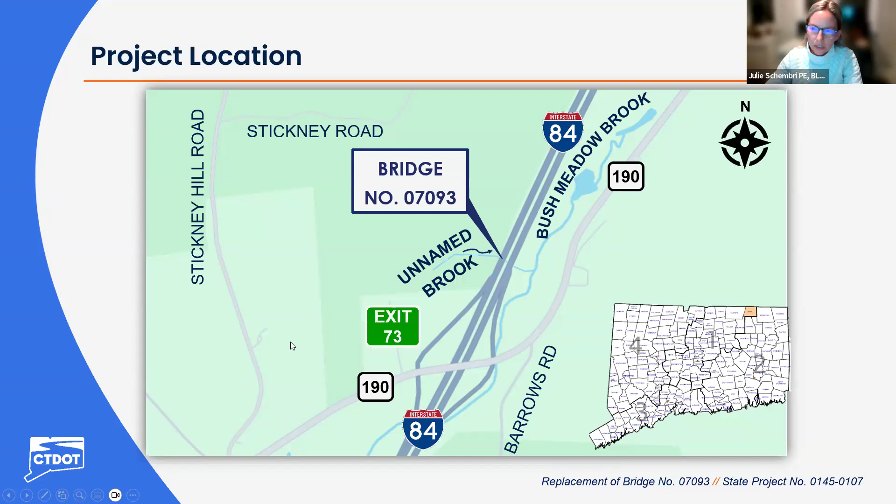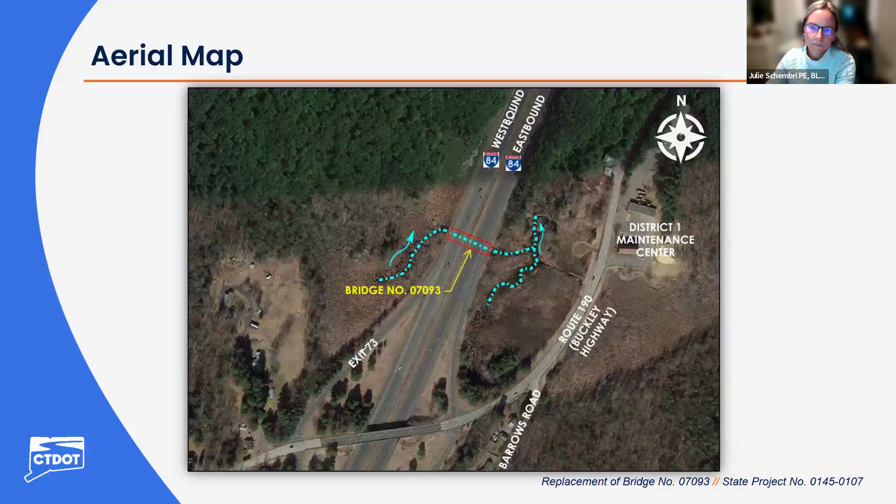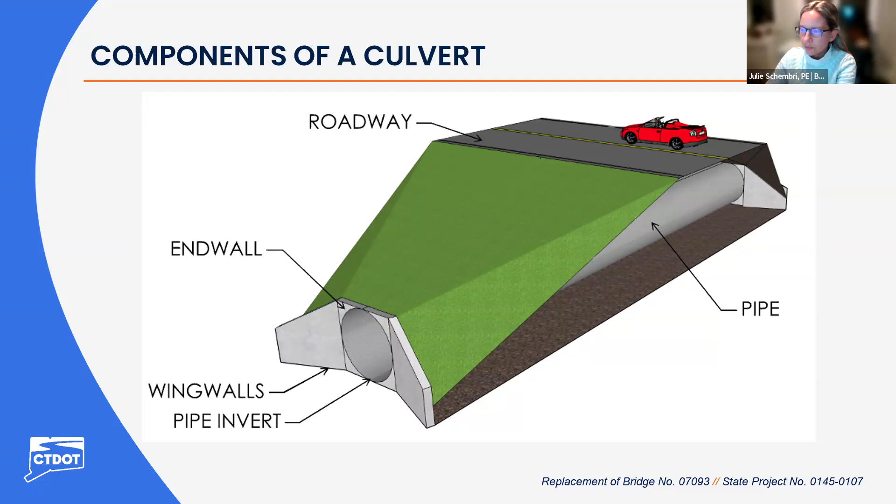Every 2 years, Connecticut DOT inspects all bridges with a span length greater than 20 feet, in accordance with federal standards. Connecticut DOT then compiles a report that includes condition ratings and any noted deficiencies.

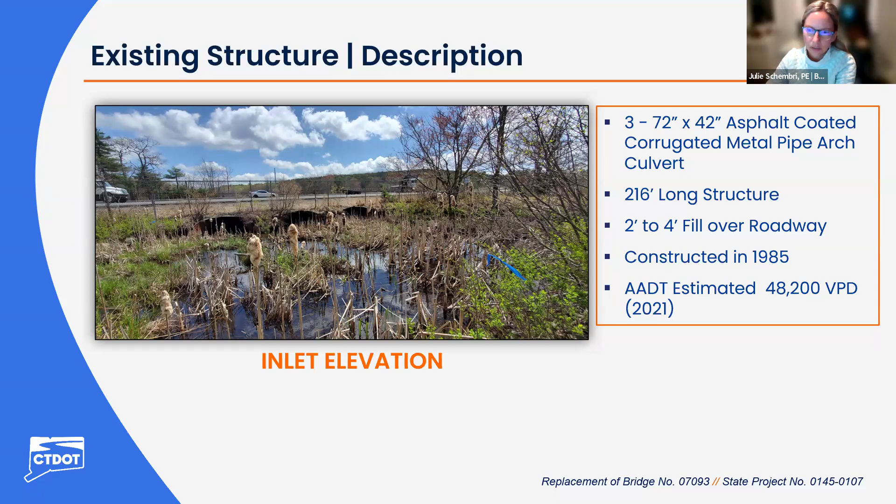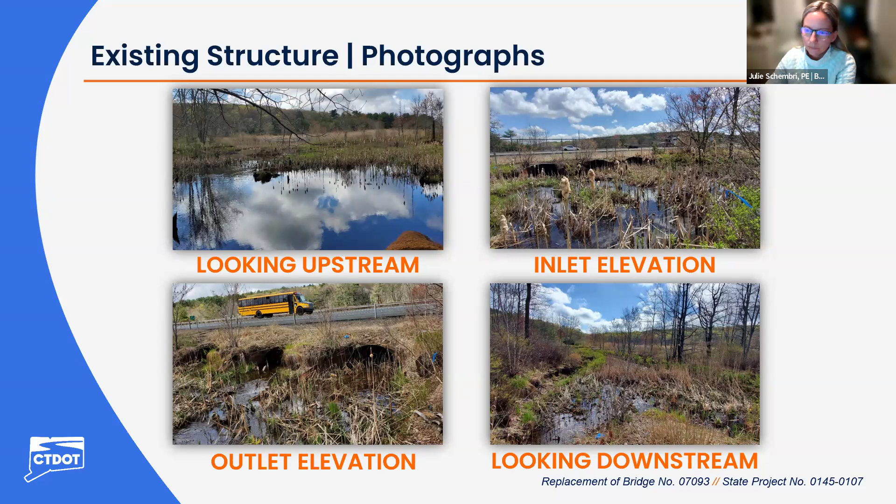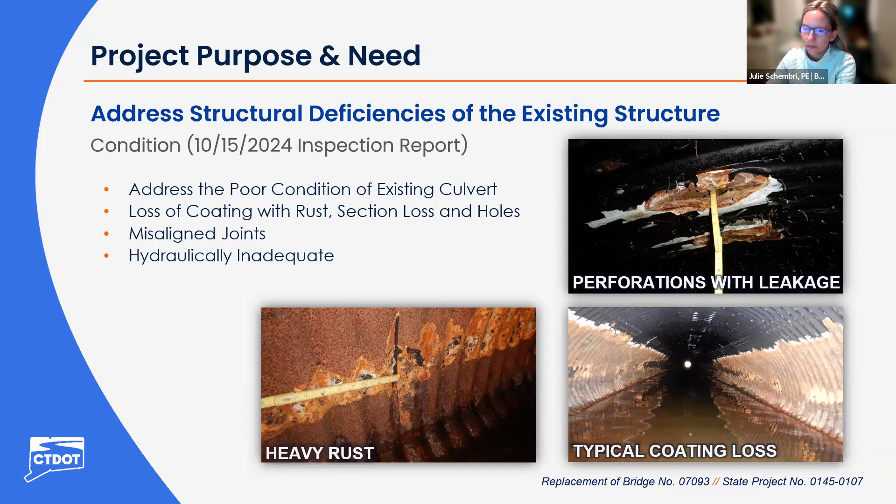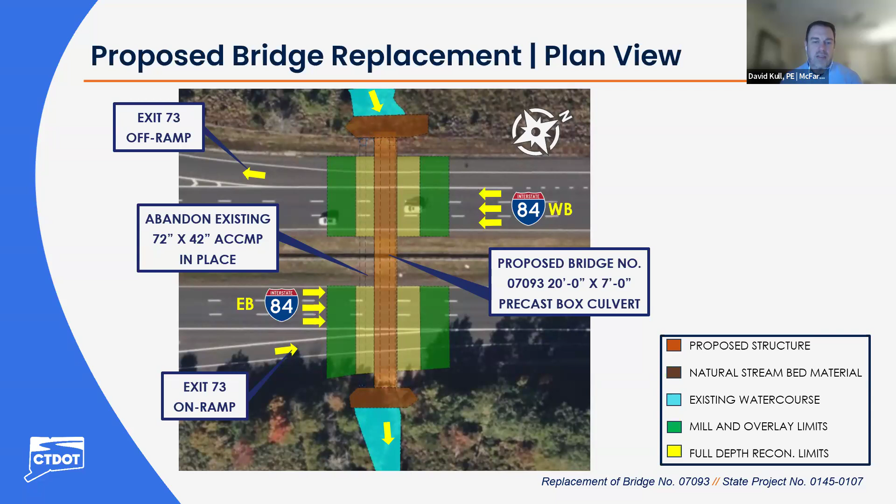Thanks, Julie. So after a study, what we've come up with is a plan to replace the three corrugated metal pipe structures with a single precast concrete box culvert. It'll be basically a square box culvert measuring 20 feet in width and 7 feet high, sized to carry all the design flow from the unnamed brook passing underneath I-84. We're going to be placing this culvert pretty much where the existing pipes are, but offset slightly so that we can use the existing pipes as a water control feature to help facilitate construction as we go in and replace them.

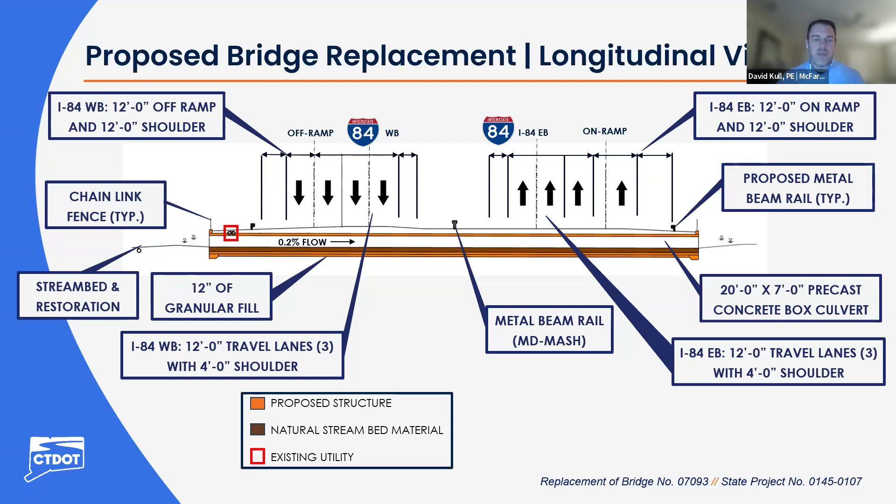So if we take a look at the next slide, this is a longitudinal view of what the structure is going to look like underneath I-84. There are a lot of different callouts on here. The main thing to recognize is that what we see when we're driving on I-84 is not going to change when we're finished with construction. This new structure, designed to last 75 years, will pass underneath the roadway, and what you see on top of the roadway pretty much isn't going to change from what you see right now.

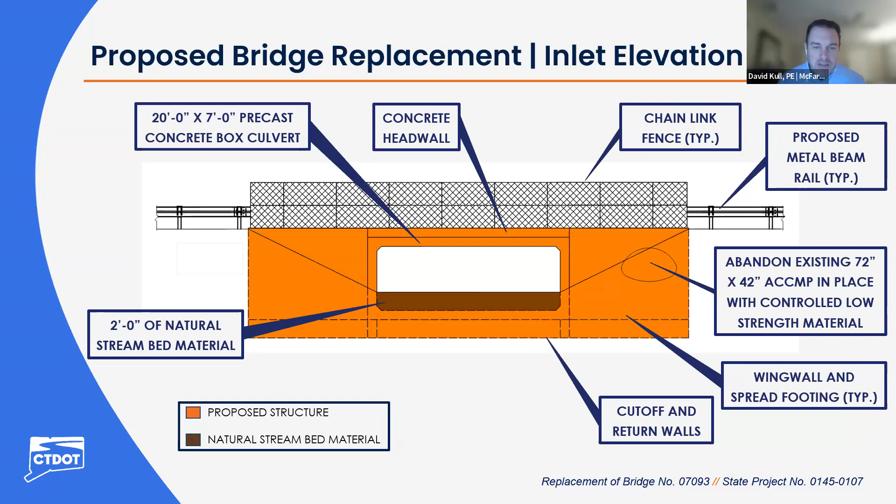So like I said, this is designed to last 75 years, and it's going to look pretty much as you see right now when you're driving on I-84. So if we go to the next slide, how are we going to build this structure while maintaining traffic flow?

I'm going to pass it over to Gene McCarthy. He's going to talk about maintenance of traffic during construction. Thanks, Dave. So in order to replace this culvert at this location, we're going to have to maintain traffic both on Interstate 84 and Exit 73. So what we're proposing is to replace it in 3 stages, essentially replacing the culvert in 3 pieces.

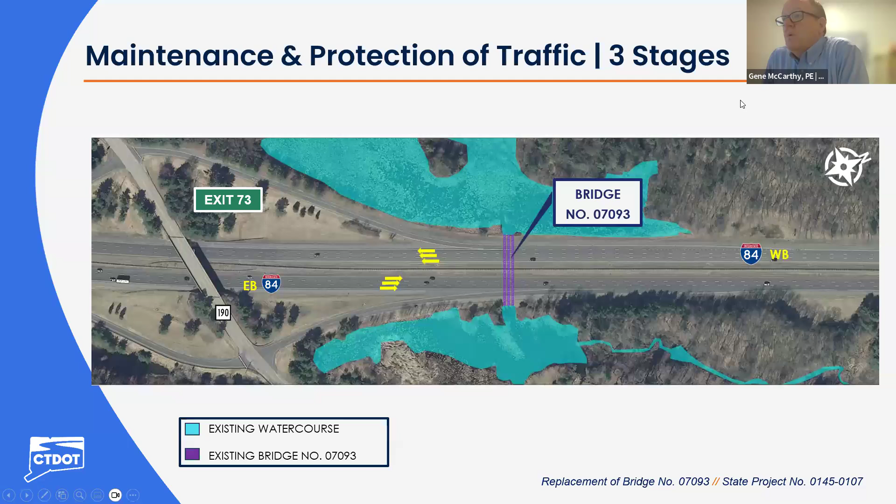Important to note, Interstate 84 has 3 lanes of traffic in each direction, and we will be modifying that during these stages of construction.

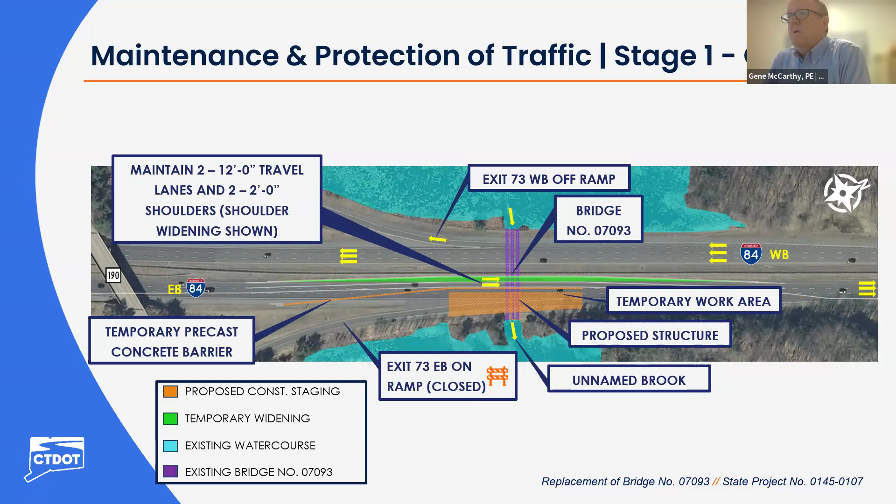What stage 1 will require is that the eastbound lanes on Interstate 84 be reduced from 3 to 2, and those lanes will be shifted towards the median of 84 to provide space for the construction to occur. As we look at a closer view, you'll see the actual proposed structure that will be replaced as part of stage 1.

You will see in green some temporary widening that will occur on the median of 84, and you'll see the 2 lanes of traffic on 84.

In orange is a temporary concrete barrier that provides protection for both motorists and the construction crews. It's important to note that this stage of construction is estimated to take about 2 to 3 months to complete.

As we move into — sorry, can you go back one? Another important thing to note for stage 1 is that the Exit 73 on-ramp onto the eastbound part of 84 will have to be closed during stage 1. There will be a detour set up for this traffic, and I will show that detour at the end of my presentation.

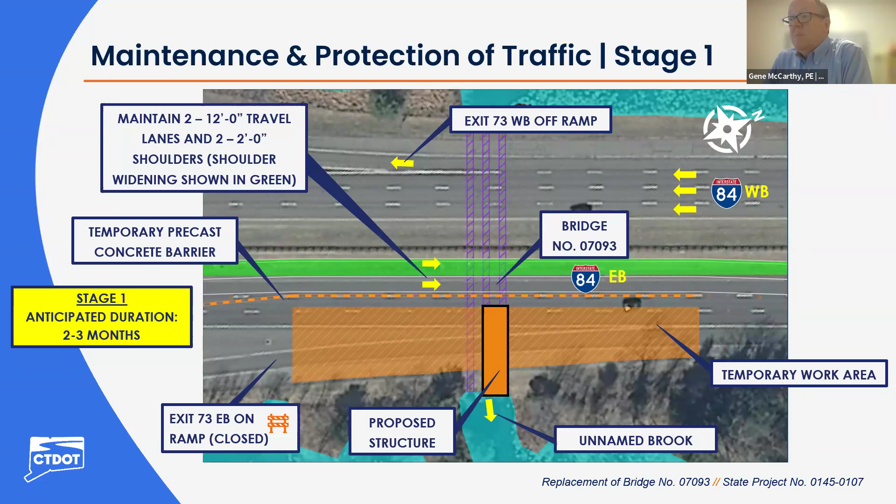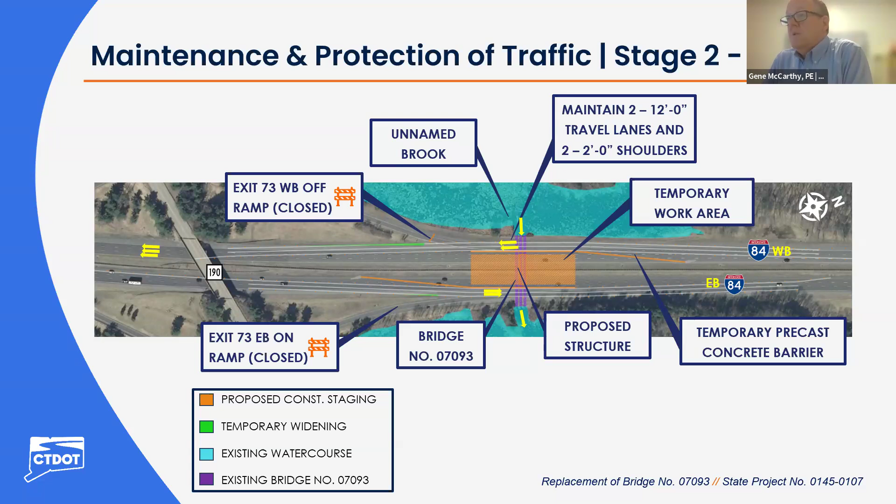In this stage, both westbound and eastbound 84 will be reduced from 3 lanes to 2 lanes. You can see that again, where they're both moved to the outside, opening up space in the middle for the work zone.

As we move to the closer view, you'll see that we're replacing a good section of that pipe in the median. We've provided temporary barriers to protect traffic and the workers.

In addition to closing the eastbound on-ramp for stage 2, the westbound off-ramp will also need to be closed. Again, I will show the detour for that traffic at the end of my presentation.

This stage of construction, because it's replacing a larger piece of the culvert, is estimated to take between 4 and 5 months to complete.

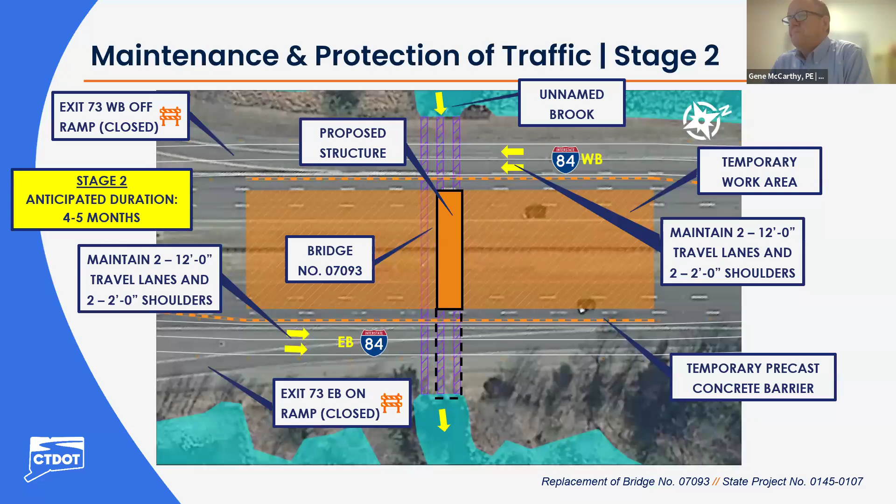So the final stage will handle the more western piece of the culvert. The eastbound section of 84 will actually be restored to its current and permanent configuration. The eastbound on-ramp will be opened up again during this stage, while the westbound off-ramp will remain closed.

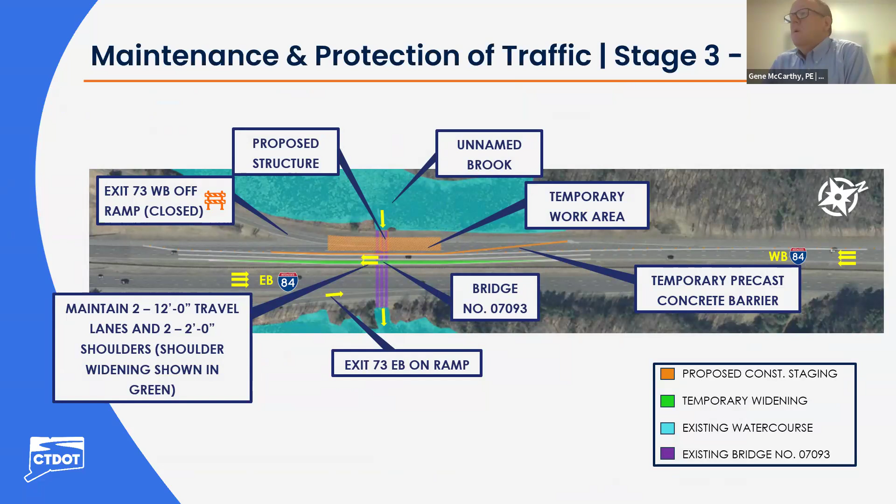If you go to the close-up, you'll see that last piece of the culvert will be replaced. This does require a little bit of widening in the median to accommodate the construction. Again, the concrete barrier will protect the workers and traffic, and this stage is also anticipated to take about 2 to 3 months to complete.

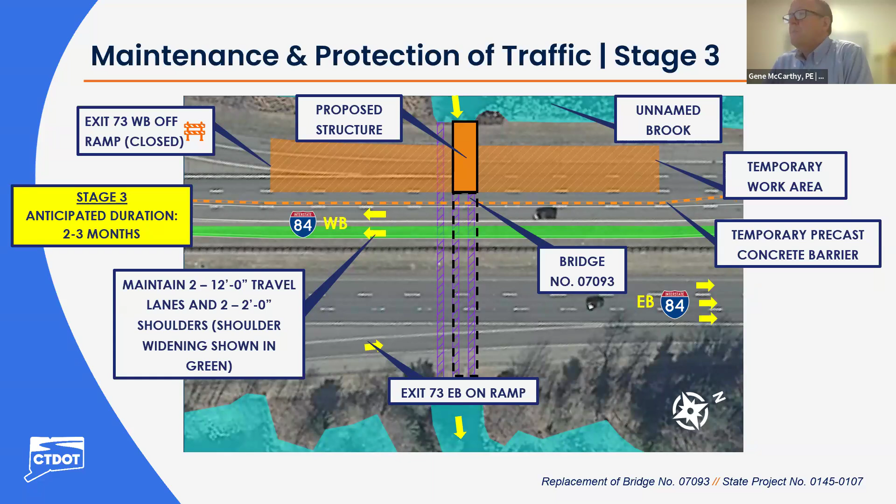For the detours, as stated, for stages 1 and 2, the eastbound on-ramp at exit 73 will be closed. The detour route will be signed, directing motorists to stay on Route 190, Buckley Highway, then to Route 89, which will direct them to exit 72, where they can enter 84 eastbound. This detour is about 3.1 miles in length.

The detour for the westbound off-ramp will occur during stages 2 and 3. Traffic on 84 will be directed to stay on 84, continue down to exit 72, get off, and use Route 89 and 190 to get back to the Buckley Highway. This overall detour is about 3.3 miles in length.

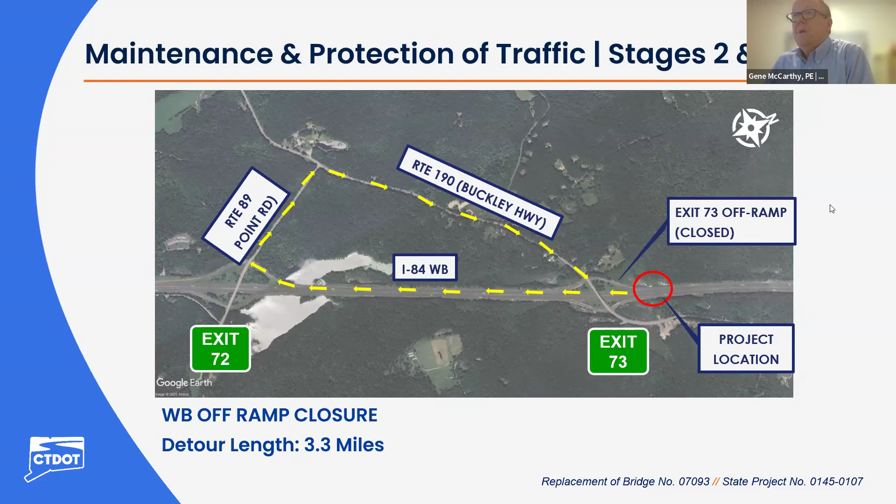And with that, I will turn it back over to Julie. Thank you, Gene. So now we'll take a look at the utility, permitting, and right-of-way needs of the project.

Utility impacts are anticipated to construct the new structure. The existing telecommunications and electric duct banks are expected to be supported in place during construction. No aerial utilities are present in the area.

Moving on to environmental permits, the project will require 3 permits: the U.S. Army Corps of Engineers pre-construction notification, Connecticut DEEP pre-construction notification, and the Connecticut DEEP Inland Wetlands and Watercourse permit. Additionally, the Section 106 process has been completed and no historic properties will be affected. Finally, for right-of-way impacts, no impacts are anticipated.

These items represent the major utility, environmental, and right-of-way considerations that will guide the design and coordination efforts moving forward. I will now pass it back to Susan Morneau with the Connecticut DOT to go through the construction costs, funding, and project schedule. Thank you, Julie.

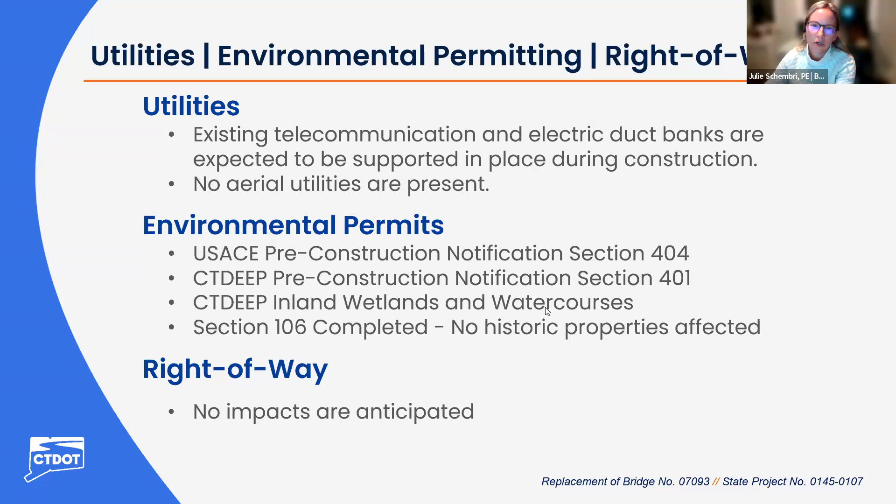This next slide shows our estimated project cost and schedule. Please note that these are preliminary and subject to change. We are currently estimating a construction cost of approximately $7.2 million, which will be paid for with 80% federal and 20% state funds. No funding is anticipated from the town of Union at this time.

Construction is also currently anticipated to begin in the spring of 2029 and be complete in the fall of that same year. We will refine this schedule as the design progresses.